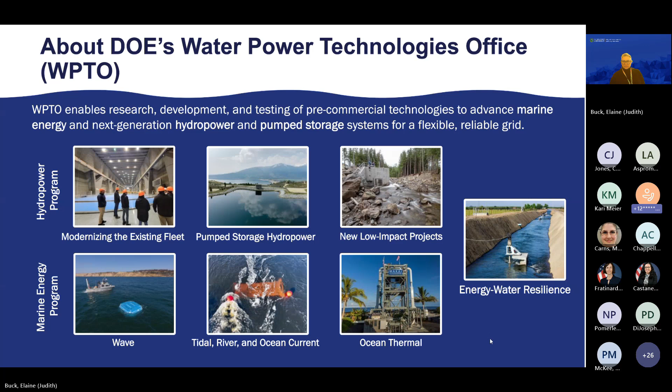such as storage. The Marine Energy Program works with wave, tidal, river, ocean current, and ocean thermal conversion. And we work across the technology readiness scale. We work with really low technology readiness ideas, from idea, concept, all the way to deployment and commercialization. Next slide.

This is a slide of the budget starting in fiscal year 2008 through present. And what you can see here is our budget has grown over time. So there's been additional investment in water power. The bars on the bottom, the darker color is the Marine Energy Program, and the lighter blue color at the top is the hydropower program. And so we've been able to work with a lot of great partners and get a lot of different projects developed.

And I think the number of topics and the number of ideas and the numbers of the different types of technologies we've worked on has increased. So it's been a really great experience. I've been with the office for 10 years. I've seen a lot of this development happen. Next slide.

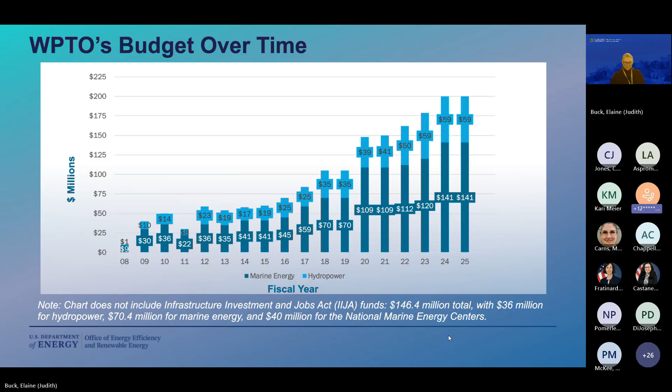Hydropower dams have an average life of around 100 years, I'd say, and so we have quite a few different dams that still could be modernized and both produce more power, but also get another 30 to 50 year term out of a federal license, for example. Next slide.

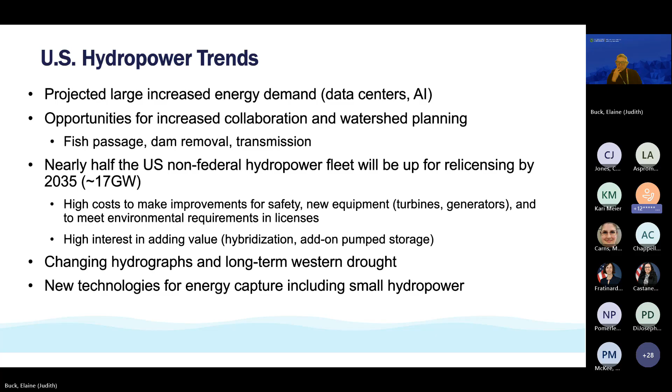We're seeing a lot of challenges in the Western U.S. The hydrograph has been changing. There's a long-term drought. What this means is that reservoirs are becoming lower, and it's putting a lot of risk on the hydropower. And we're seeing a large increase in developing new technologies for energy capture, things like putting hydropower in pipes, or developing turbines that work really well in really low height dams, so that you could potentially add power for dams you want to keep. Next slide.

And this is just another map from Oak Ridge National Labs HydroSource program that has split up different watersheds and looked at when we're going to expect to see the Federal Energy Regulatory Commission licensed hydropower plants coming up for relicensing. And it's scaled by capacity. So it's just another way of illustrating when things are going to happen.

And as it goes from a blue color to an orange color, that's over, sorry, I'm saying it backwards. As it's going from the orange to the blue are later in time, and the orange and yellow projects probably have almost all the information required at this point, or are working actively to get it. So this is a huge challenge. If we, for some reason, didn't have these plants, you can see it's a lot of megawatts that we might lose. And in some areas, there's a cluster of small plants which have a more challenging time sometimes financing improvements.

And so with this program at the lab, we have a huge wealth of information, environmental information, information about the equipment in the facilities, et cetera. So if you're interested in this kind of thing and data resources, I would definitely check out HydroSource.

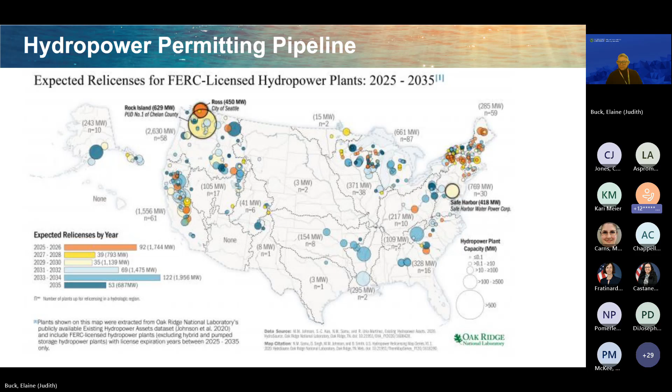This is a slide that is highlighting a project that's really focused in on non-powered dams. Because there are so many non-powered dams, it's been a huge thing to consider. If you have a dam that's in place, it's providing irrigation or flood control or something like that, provides a lot of benefits to your community. It might be another added benefit if that dam is going to be there to add power. And so there's a whole suite of tools that we've developed primarily at our national labs.

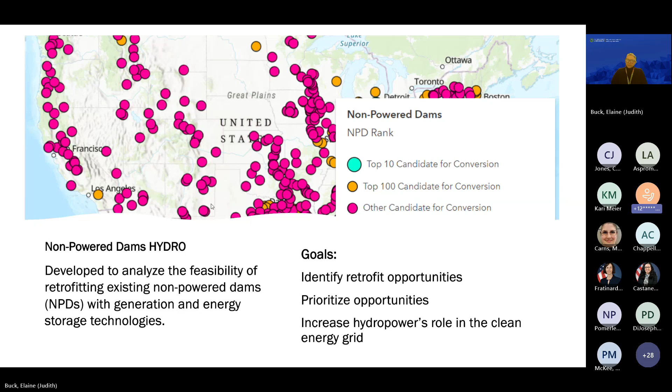And I think this is just an example of a model run with what the tool would look like, where people were saying, we want to identify where we can retrofit dams, prioritize opportunities, and I think they said, where can we increase the role of clean energy in the grid with this scenario. That's an example of the type of tool that the national labs are building for this specific topic, but we have quite a bit of investment in this area and have provided a lot of support to industry in using the tools as well. Next slide.

This is a relatively new initiative, the Hydropower Testing Network, HyTN for short. This is an idea that we've been thinking about for a long time at the Energy Department, because we don't really have a hydropower specific test bed. We have hydropower dams that we may be able to work with the owner or operator to utilize to deploy technologies, but there's a lot of risk to that. No one wants a science project at their dam that is important and potentially has safety issues or could create an electric outage if someone's working on it. So it can be sometimes really challenging to partner with owner operators.

Other times it's a little bit easier, like they may really want some data or be really interested in technology and have their hand up to work with us. But the idea here is to create a network of labs and facilities potentially, where we can have a continuous stream of funding to help people with innovative technologies find a testing facility, to get them just a little bit of data to move forward,

to help create an innovation ecosystem to match technology developers with facilities that can help them complete testing. And so we've just in the last year or so launched this network. So we've gotten people to say like, hey, I have this testing capability. This is how much it is to utilize it. And we've gone through the first round of evaluating proposals for partnering.

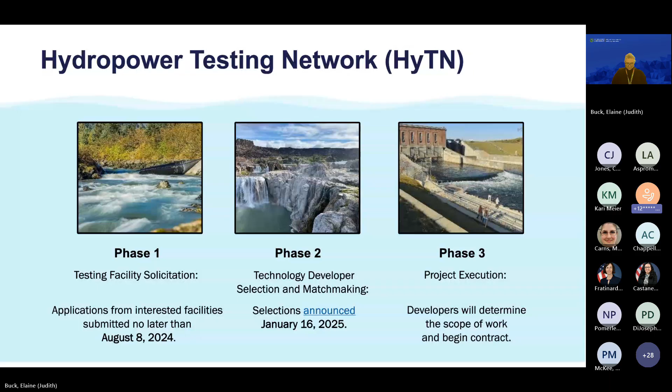This is a new initiative that we're looking to evaluate its effectiveness to deliver test results faster. Next slide.

This is something I've worked a lot with at DOE. Some of the largest focus for the environmental portfolio is improving downstream fish passage when fish are migrating or moving downstream. If there's a dam that has hydropower turbines, often they're required to screen or to put other fish protection technologies on the dam to avoid them from being entrained or moved with the flow of water through the turbines.

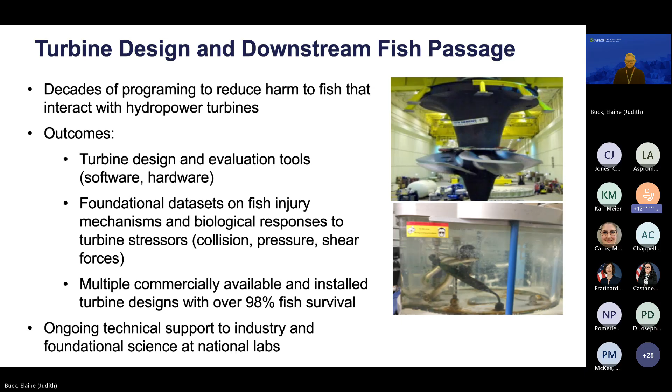But we've spent a lot of time developing tools to improve the biological performance of turbines and to be able to design turbines that are safer for fish and don't harm them. And so this is an example of, we've had quite a bit of funding in this area, and we've worked with both industry to enable them to uptake these design principles, and also the national labs and others to develop the foundational information to support the design standards and tools. Next slide.

And yeah, the pump storage hydropower is really related to our grid portfolio. We've both learned that the industry is very interested in valuation of flexibility or the storage, the ability to potentially store water over seasons or shorter periods of time to support the grid. And so we've developed quite a few tools to help better understand the value of storage or pump storage to provide long duration energy storage.

We provided a variety of technical assistance to industry to help people understand choices they may have. Would a battery provide that flexibility, or would you consider upgrading to add some pump storage, which is really like a water battery. It just works from pumping water between different elevations and storing it to be released into flow through turbines. And so you can use an existing dam as the lower reservoir, so to speak.

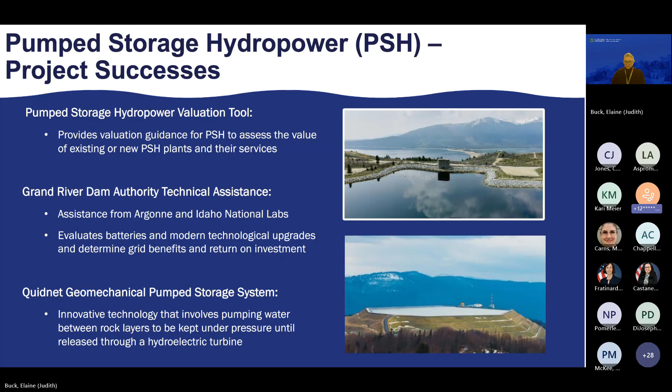And then there's been some really cool innovative ideas. This Quidnet geomechanical pump storage idea was looking at pumping water into abandoned wells. I believe they were from oil and gas or fracking wells potentially. But so there's also been some really creative ideas of how you could create like micro storage almost that we've invested in and helped the companies to establish some baseline feasibility. Next slide, that might be it. There might be one more.

Oh yeah, I guess this is a great thing to point out. We're often working with partners. We have a lot of different partners on the hydro side. There's this group of, they call them the visionaries. There's a group that's actively participating and mapping out a 50-year vision for the hydropower industry, and it's really an industry-led effort that our national labs support. I talked a little about the HyTN Hydropower Testing Network.

I work with broad groups of industry, resource and regulatory agencies, NGOs, to host environmental and industry summits to highlight research needs and to help with partnering for environmental efforts. We have had a few different memorandums of understanding with the different federal owner-operators, and more recently with some of the research institutes in Norway. Norway has a lot of both hydropower and pump storage, and it's been an interesting opportunity to work internationally with them.

And then I myself participate with the Fish Passage Task Force, which has the 13 agencies that either own or operate or evaluate or have something to do with hydropower. Maybe they have some regulatory authority over them. And so we've helped to coordinate R&D and to provide a flow of information.

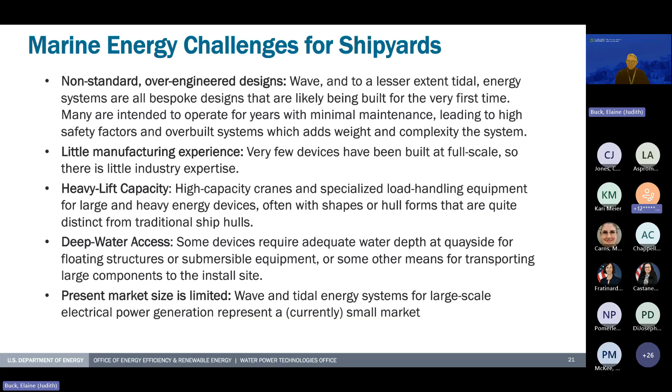We don't exactly know how the damage occurred. We know where on the device, but it was significant enough that there had to be significant repairs done in Hawaii. And it was a challenge in Hawaii because the original fabrication and manufacturing occurred in Oregon. So trying to find the same steel as well as the people who had the experience was a real challenge.

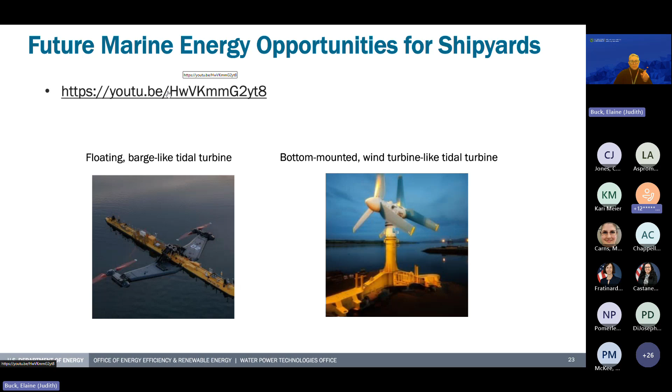It's the size of a small airplane, and it has two blades, and these wings actually retract down into the tidal flow. It's a really very cool piece of equipment that has now been deployed actually in Scotland at the Orkney test site. So let me see if I can get this to work, because it demonstrates the size of these devices and the ports and where they've been deployed.

So I might have to get through some ads here. Apologies. Thumbs up if you can see this. Thank you.

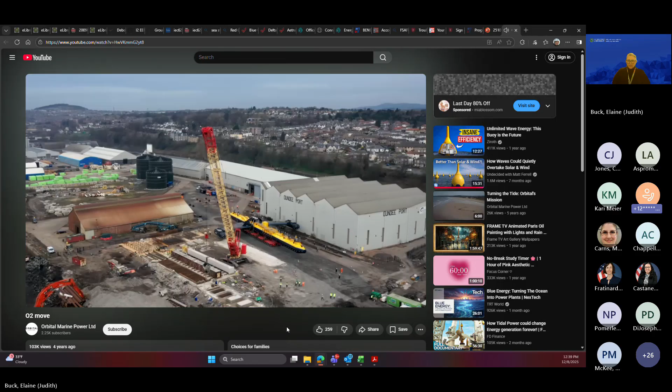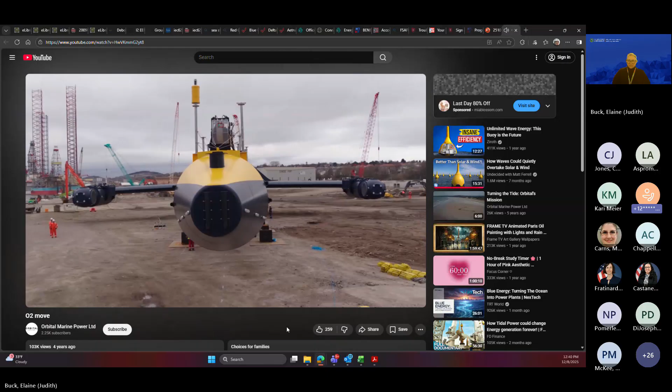So this is Orbital, and this was at Dundee Port in Scotland. I think that's a really good example of the challenges that they have with moving around a device and actually getting it off the quayside and into the water. This was a simple tow to the site in Orkney, but other devices don't have that luxury.

I'm going to stop sharing for 2 seconds so I can get back to the slide deck. Okay.